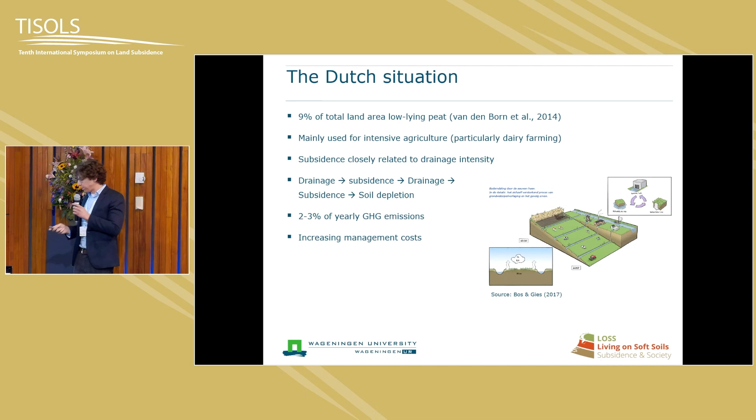So because of that, there is now also a policy discussion. The business as usual scenario used to be that we go down this path of continuous groundwater lowering to keep pace with subsidence. But now the policy discussion is tending more towards higher water levels to avoid damages and emissions, but maybe also to save the peat for future generations. I don't know whether that is much discussed in the policy documents, but we argue in this paper that it should. But that comes at the cost of current economic activity, without a doubt.

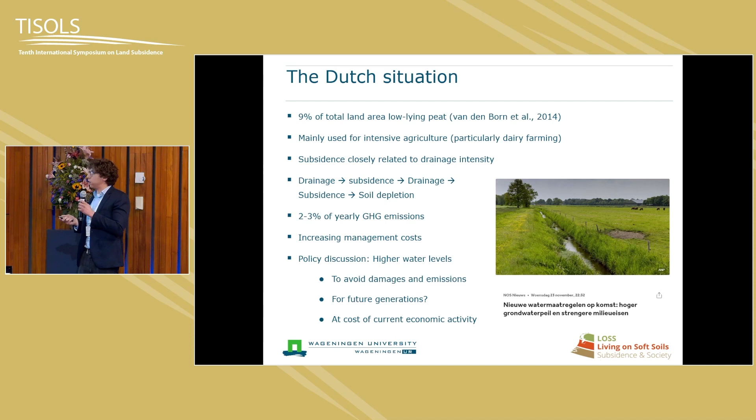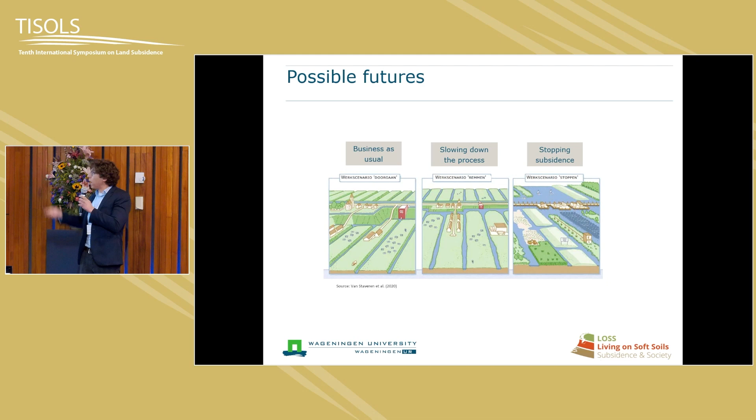So usually when we talk about these economic evaluations, we talk about possible future scenarios. I think these three types of scenarios we've already heard today. The business as usual case, the case where we slow down by fixating groundwater levels and we go slowly down towards that level, or actively heightening groundwater levels to stop subsidence. So what we typically do is then evaluate the effects of such scenarios. What we try to do here is, from the dynamics of subsidence in relation to economic elements, come up with, and that's what we are interested in as economists, what is an efficient use of our resource.

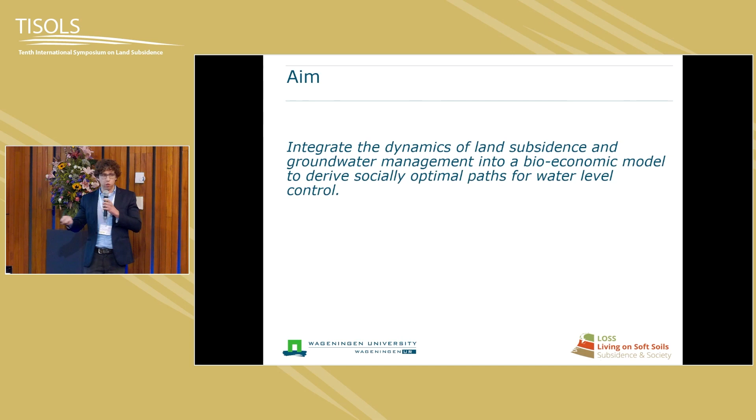So what we try to do in this paper is integrate the dynamics of land subsidence and groundwater management into a bioeconomic model to derive socially optimal paths, so a social optimal policy over a long period of time. And for that, we use a technique called optimal control theory, which is basically a mathematical framework to find the best control actions for a dynamic system, subject to constraints and objectives. So we have an objective that we want to reach, something that needs to be maximized or minimized, and what kind of control actions do we need to take to reach that objective, subject to constraints.

Optimal control theory is widely used in many disciplines, but in economic natural resource problems, it's used to decide how to manage a scarce resource efficiently over time. And from this technique, we can derive optimal policies analytically, but also with numerical simulations. We do both in the paper, which guides the development of efficient long-term resource management strategies.

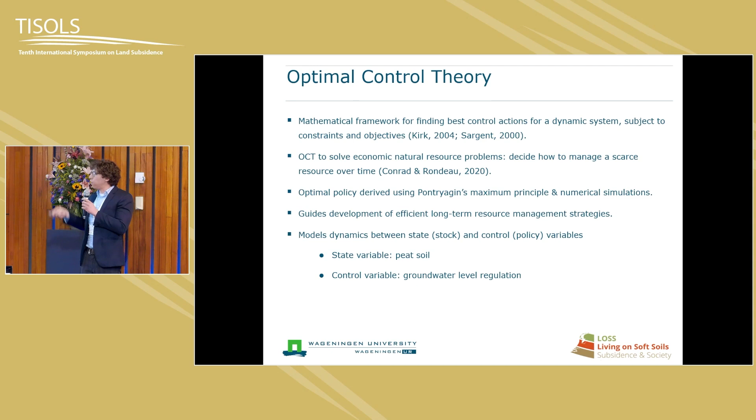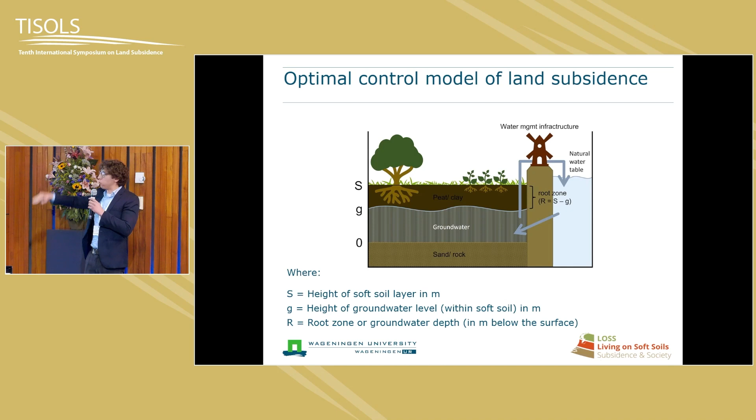And for that, we need to model the dynamics between state variables and control variables. In this case, the state variable is this peat soil, or the soft soil, that is our resource. And our control variable is the groundwater regulation that we can apply, which looks very schematically a bit like this. So for mathematical reasons, we measure the height of the groundwater level from a 0 point, which gives the groundwater depth we indicate with an R. I'm going to skip this for time.

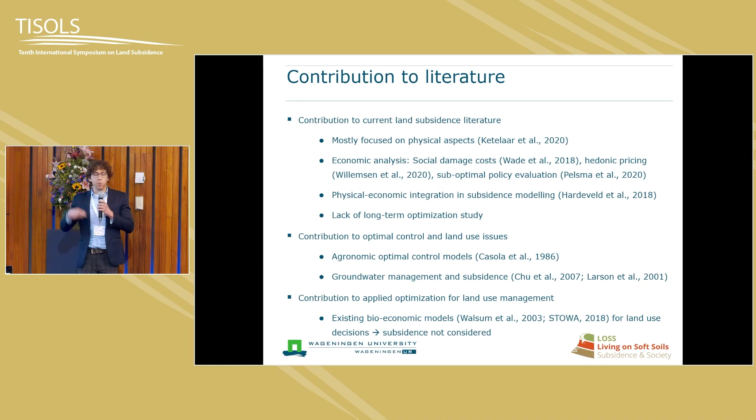So what is fundamentally different from existing economic evaluations is that instead of predefining a set of scenarios that you evaluate, we build a model that gives as an output the optimal policy.

So that's the fundamental difference. So that's what we have. So we only need as input a few local physical and production parameters, economic parameters, a discount rate, because we are talking about dynamic systems, and some soil measures. Then we have the optimal control model that models these dynamics between soil subsidence and economic elements. We have included here only agricultural revenues and water management costs, but we are working on extending this.

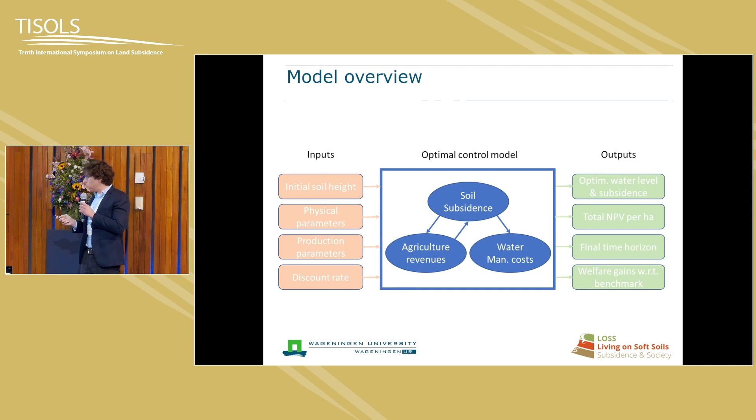And as an output, we get an optimal policy, basically the total economic value for such a policy, a final time horizon, and welfare gains with respect to a benchmark; I will come back to that later. So first we have to define an objective, which is basically to maximize the total economic value over a period of time from a plot of land. And there we include the agricultural net revenues and the cost of water management up to the end of the time horizon.

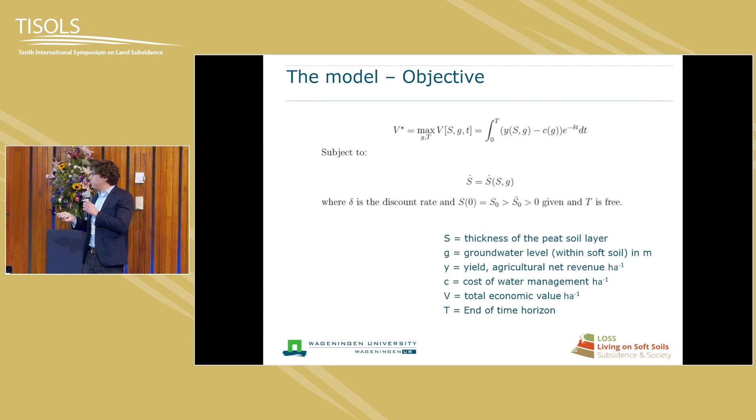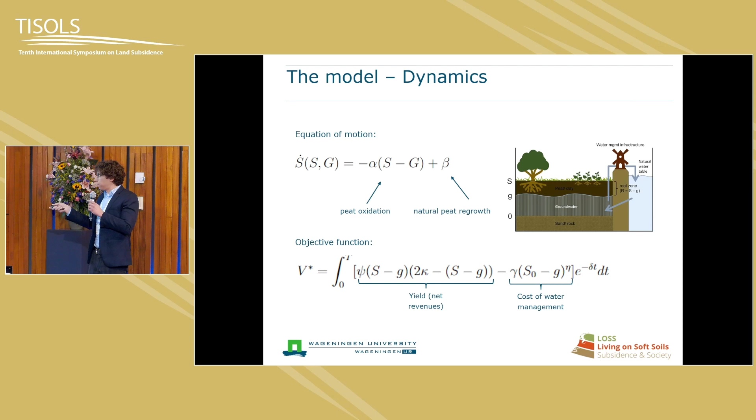So then we model the dynamics. We have an equation for the subsidence. We have an equation for the yields, which is related to both our state variable and our control variable, because of course with wetter conditions we have less yields, and the other way around, up to a certain point we can increase our revenues by further drainage until it becomes too dry. And we have cost of water management, which increase in absolute depth. We can play around with that as well.

And we have to define what our end time is. So we define our end time as when our soil doesn't have economic value anymore. That is either when further subsidence is too costly, because maintaining costs become too high, or when the water level reaches below the peat, because then we can't do anything about subsidence anymore with the groundwater level, our control variable. And then we have a few scenarios: what is below then? Is there a layer below that still has some economic value that we can use, or not at all? And we work around with it.

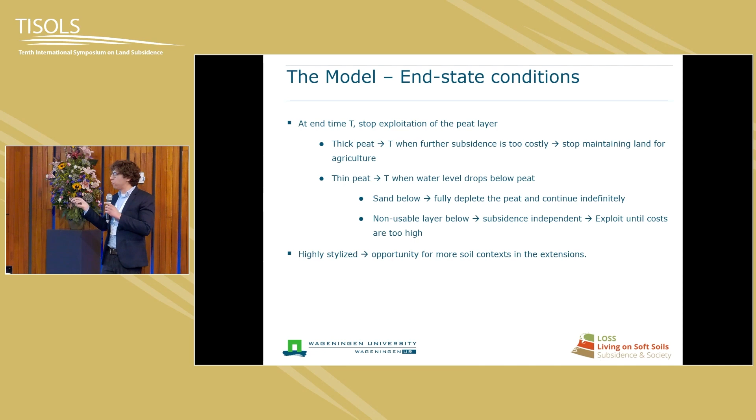I can imagine that this sounds very highly stylized, and we have opportunity for more soil context in extensions, but what we try to do here is to have as simple as possible a model that is still analytically tractable, that we can give economic interpretation to, and that still reflects the core dynamics of the system, right? And we can extend that, but then it becomes much more difficult.

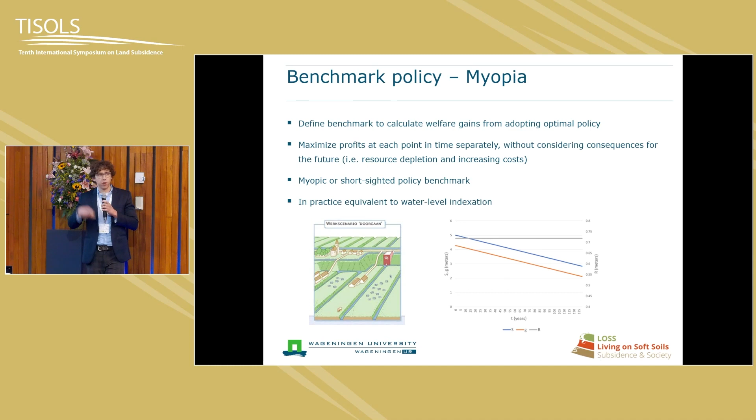We compare that to a benchmark policy. So from the model, we get the optimal policy, and we compare it to a benchmark policy, which we call myopia, which is basically a policy where we maximize profits at each point in time separately, without considering any consequences for the future of our decision now. So we call that a myopic or short-sighted policy benchmark. And in economic terms, we equate marginal costs with marginal benefits at each point in time.

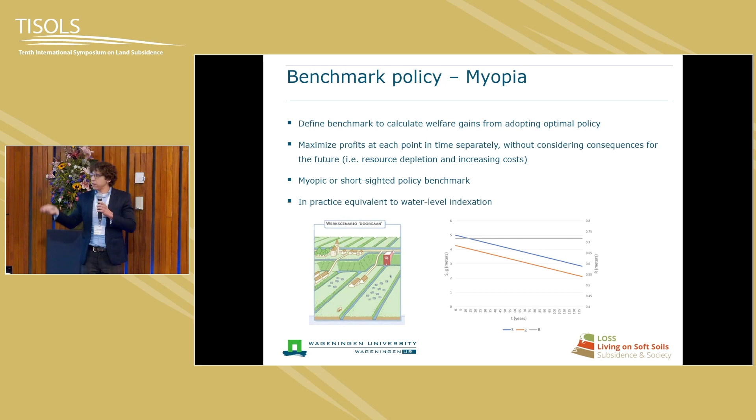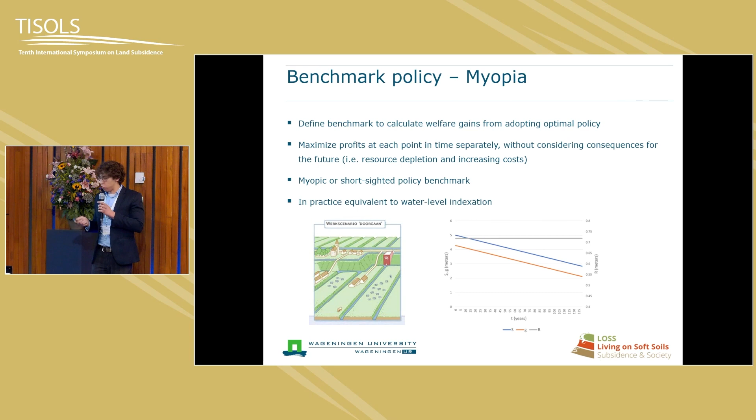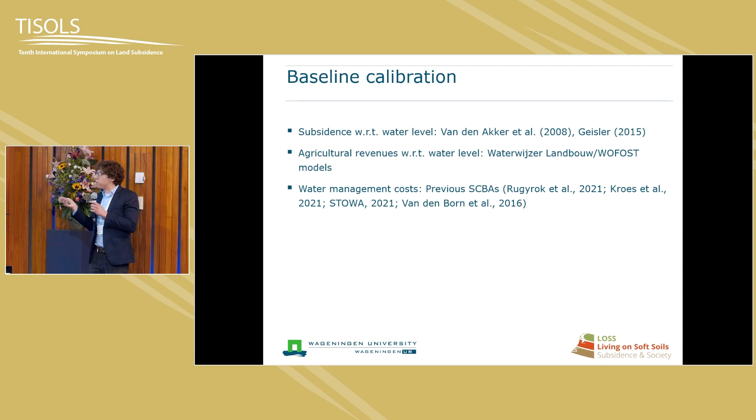And we show mathematically that this is equivalent to water level indexation, basically the business as usual scenario for the Netherlands, where we lower the groundwater level in keeping with subsidence at a certain root zone. So this is not considering future costs. We do a baseline calibration to assign parameter values based on subsidence relations that are also used in other models, and agricultural revenues and water management costs from previous social cost benefit analyses. There are a lot of assumptions in that research as well, but it's the best parameters that we have for this.

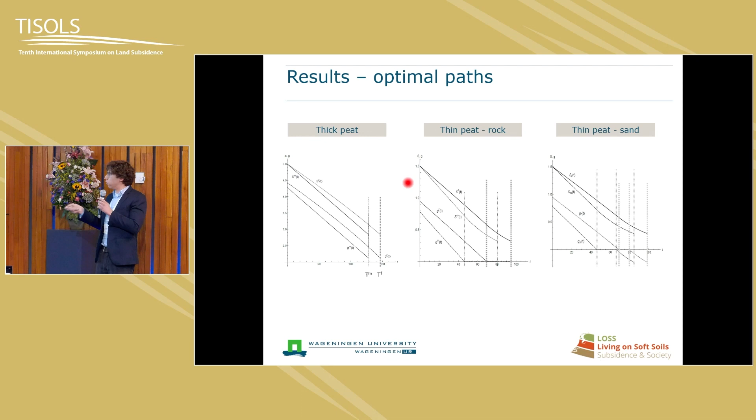And that gives optimal paths for subsidence, which we compare. The dotted lines at the bottom are always the groundwater level, and the straight lines are always the soil thickness. So with thick peat, you can see the lowest line is the myopic groundwater level, and this line is the optimal groundwater level. It's higher throughout time, which means we have lower subsidence, and we extend the period over which we can exploit this peat soil. So we save more for future generations. This is optimal compared to the business as usual scenario. We worked that out for different scenarios as well, but this might be more indicative.

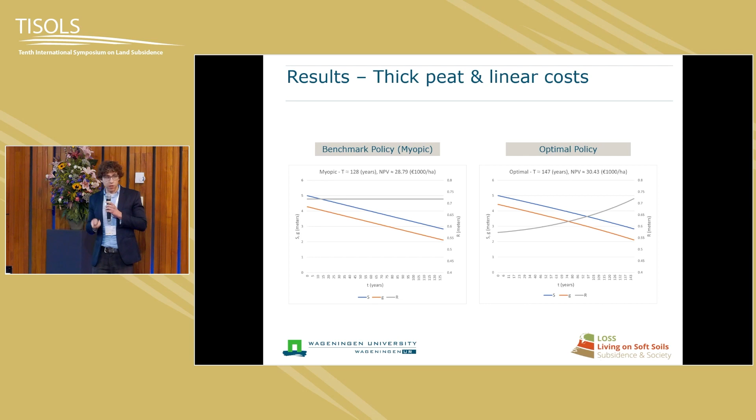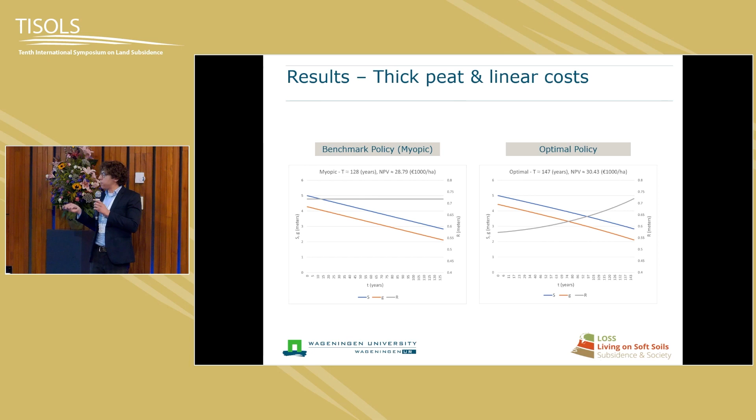So we have the benchmark policy, and we have the optimal policy here, when we assume that we have linear costs in depth. So as we go down, our costs increase, but linearly, so the marginal cost of every lowering is the same. And then we get a groundwater depth which is lower, but surprisingly increasing over time. So it's actually optimal with these assumptions to heighten water levels now compared to the benchmark, but reduce that effect over time.

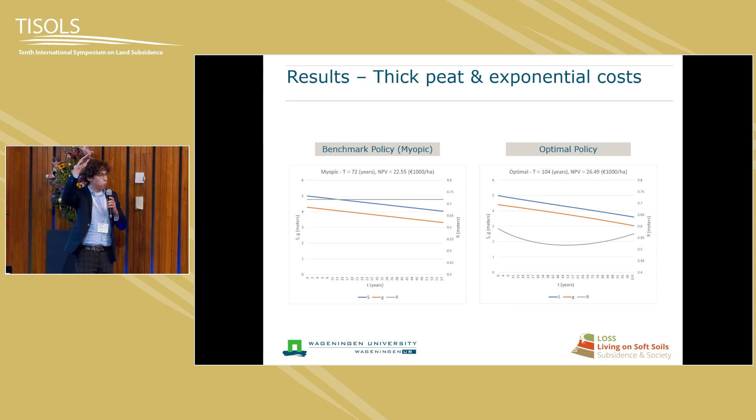Now, for these very long time horizons, you could argue that this is not a good assumption, that these marginal costs actually increase as we go down further and further over time, because we need more infrastructure, we need larger dikes, we need to pump the water higher up. So there is actually an exponential element to these costs. And if we assume that, then we see that the benchmark policy has a much shorter time horizon, of course, because it's becoming much too expensive much more quickly.

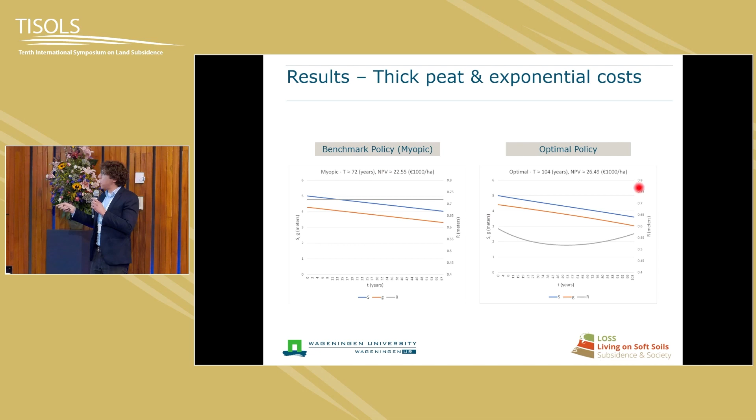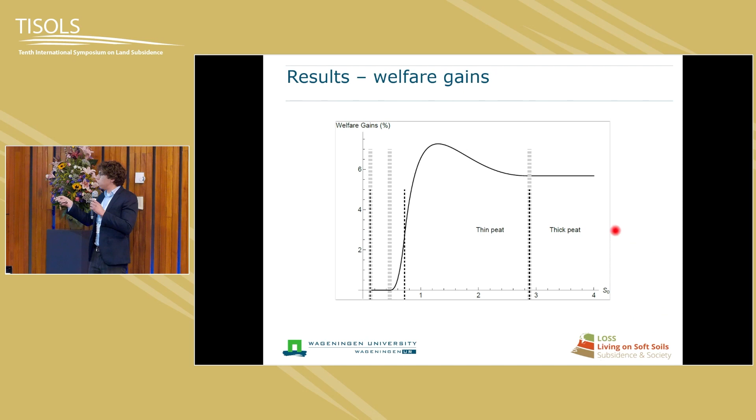And in the optimal policy, we have a much higher groundwater level over time. And we have much higher welfare gains from adopting an optimal policy compared to the benchmark. So we can play around with this to see the welfare gains compared to how much peat we have in the initial situation. That's this.

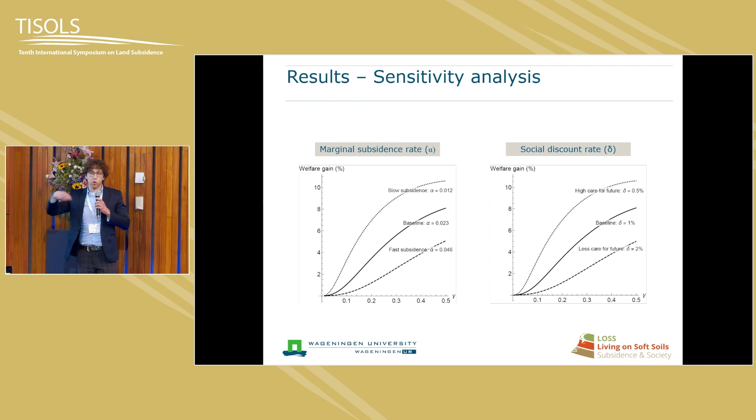Of course, we can play around with the assumption of the parameters that we use in the model. So if we have slower subsidence, our welfare gains from adopting an optimal policy compared to the benchmark are higher. And if we apply a lower discount rate, we also have higher welfare gains from basically extending the period, slowing down subsidence, which is logical because a lower discount rate means we have more care for the future and for future generations.

So, in conclusion, we show in our paper that water level indexation is a myopic policy, so it does not consider future generations. It is socially optimal to heighten water levels now to save resources for future generations, even without considering external damage costs, because remember, we didn't include that yet in our paper. So this is important to remember. Just the saving for future generations is already a sufficient rationale to heighten groundwater levels now. And ignoring this dynamic efficiency leads to substantial welfare losses. And this finding supports the current policy trends and the policy decisions.

The most important next step that we are currently working on is to add greenhouse gas emissions to the objective function as a cost function of subsidence, based on the interaction with the water table. Of course, we not only want to include CO2, but also methane emissions, which can be a bit of a counterbalancing factor with very high water tables.

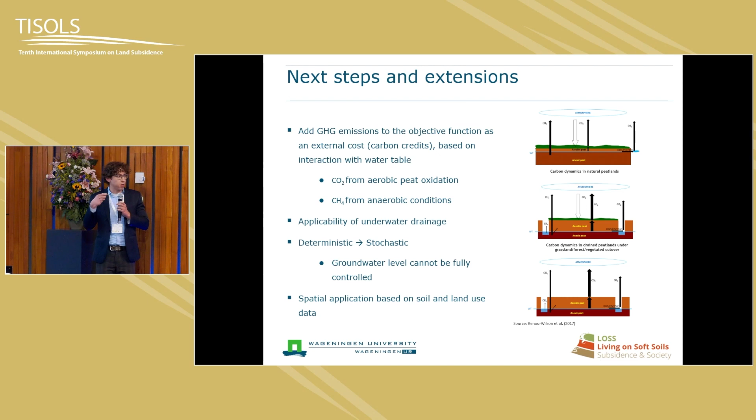So when we take into account greenhouse gas emissions, we need to also take into account the trade-offs that might be there, which also allows us to calculate the applicability of underwater drainage and infiltration drainage, because this basically reduces emissions while maintaining agricultural outputs, but it comes at an investment cost. So that is something that we can include in the model as well.

Now the model is deterministic. We can add some uncertainty, as the groundwater level, of course, cannot be fully controlled. There are some fluctuations that might exaggerate subsidence that we cannot control. And if we do that, we are able to have a spatial application of this model based on soil and land use data for the Netherlands.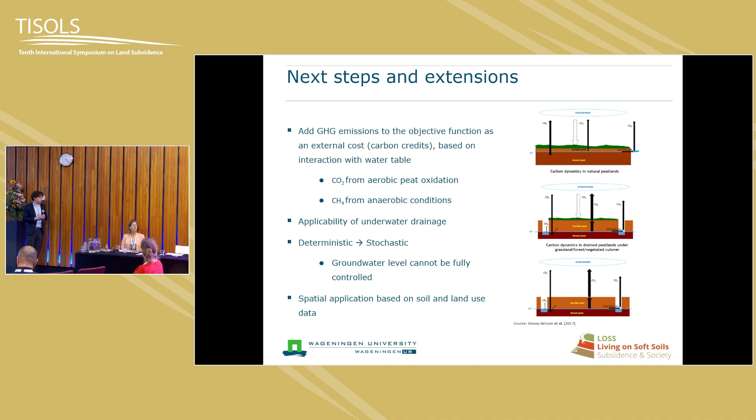I have a question. The agriculture, I guess it's about the cows and so on. Paludiculture is not involved, I guess? No, indeed. We don't allow for land use change or other agricultural activities, but we could. For example, if paludiculture becomes economically viable, we can add that as a parameter of economic output when we have very low groundwater levels, and see what that does to the model.

But with all these kinds of extensions, we have to resort to numerical simulations, because the results become intractable. So we want to single out this generational trade-off with this model, and then we can add modules to that. Yeah, and for the rest, I think it's interesting to add the greenhouse gas emissions. Then the outcomes will probably change a bit. Yeah. Hopefully. Okay, I think that's it.

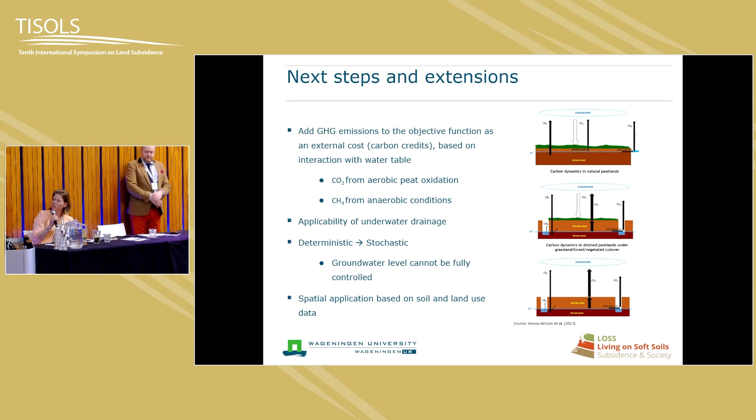Any further questions? Saskia? Yes, Davy, thank you for an interesting talk. I was thinking about our previous speaker, and how do you engage with your stakeholders and try to go beyond your research outputs and make impact? How do you do that now, or plan to do that in your research?

That's a good question. I think that comes into play when we... I hear this alarm going.

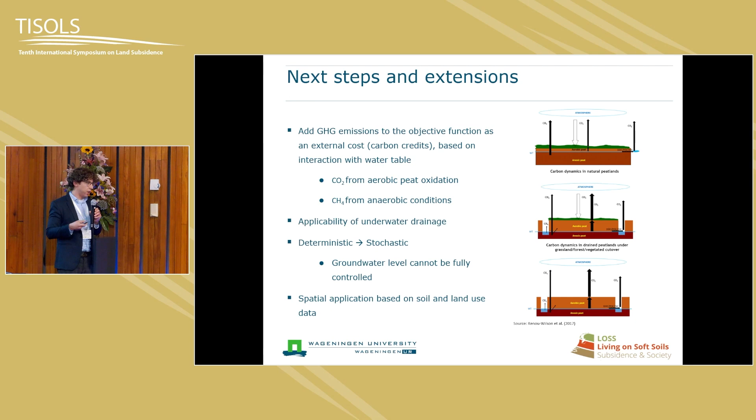So this first paper is, of course, largely a theoretical exercise to indicate the policy relevance. But of course, we want to use this to also go more towards cost-benefit analysis of concrete policies that are put forward. And there, I think this stakeholder engagement of what is actually possible in the field, because that is a bit ignored here, what is actually possible to implement over such a long period of time, becomes very important. Yeah.